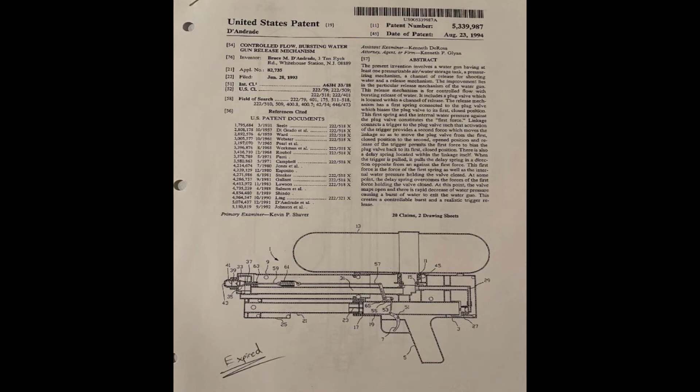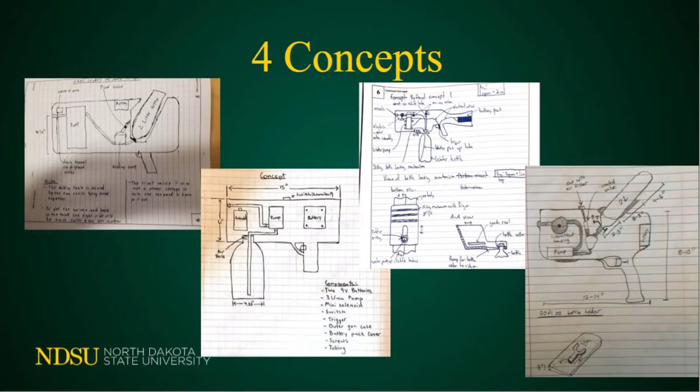The main project requirements are that the blaster needs to look fake, water needs to be stored in a 2-liter pop bottle, it also needs to have a continuous and intermittent stream of fire, and the continuous stream needs to reach at least 20 feet. Initial research was to determine whether we go with the water blaster or foam dart blaster. After research with patents and the market, we found that the water blaster would have a better opportunity to serve the market. The next step was to generate 4 concepts.

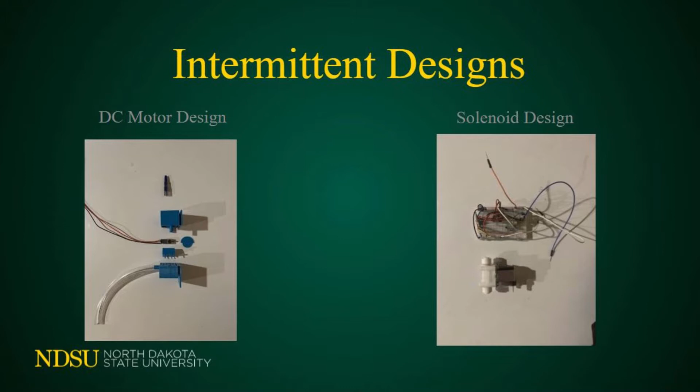All concepts included a water pump, battery pack, a general intermittent design, and a 2-liter pop bottle for a water tank, which were all in different configurations. Higher detailed intermittent designs were created later. 2 intermittent ideas were designed further for testing. For the first design, a DC motor rotates a plastic wheel into the line of water. A pen cap was used to push the DC motor up and down to generate a solid and intermittent water stream in the same design.

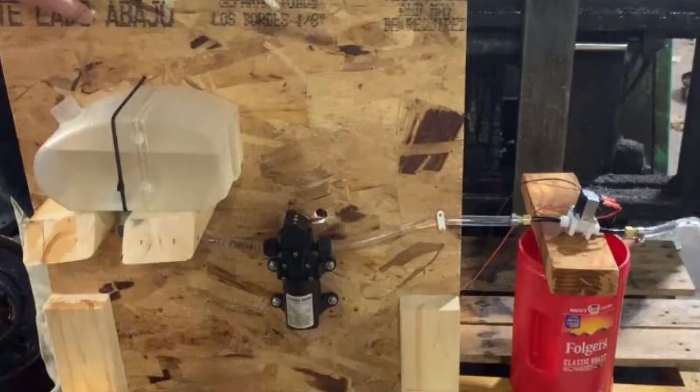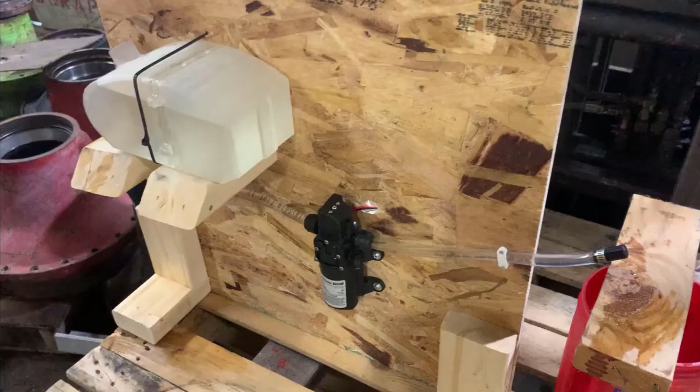The second idea was to power an normally closed solenoid to start and stop the water flow at a specified time increment. This was purely electrical. For testing, 3 different pumps were purchased to see which would project water the required 20-foot length. To reduce issues with water and the electrical wiring, a test stand was made to easily test other components such as various nozzles and 2 intermittent designs. When testing, issues were found with supplying enough air into the pop bottle without crushing when water was pumped out. The new requirement was then set by the sponsor to create a tank that can be removed from the launcher.

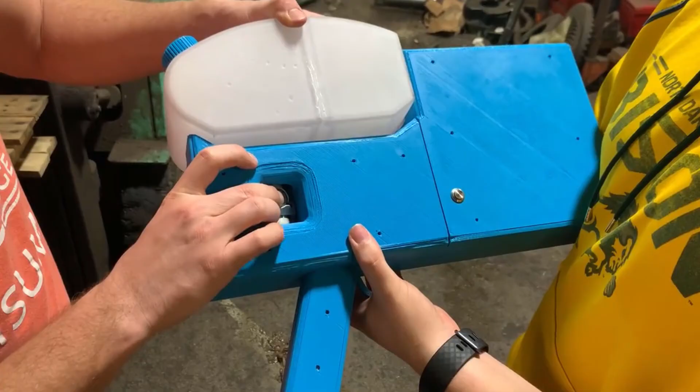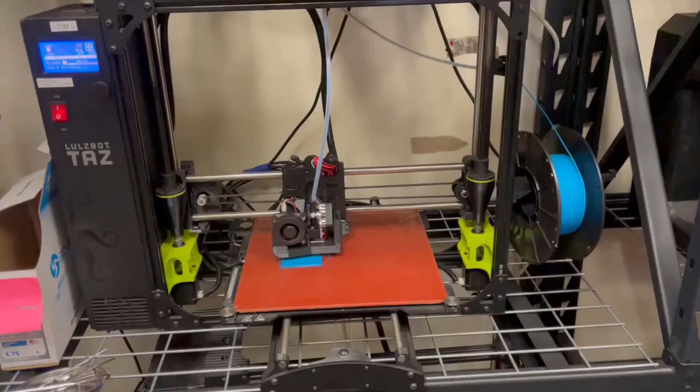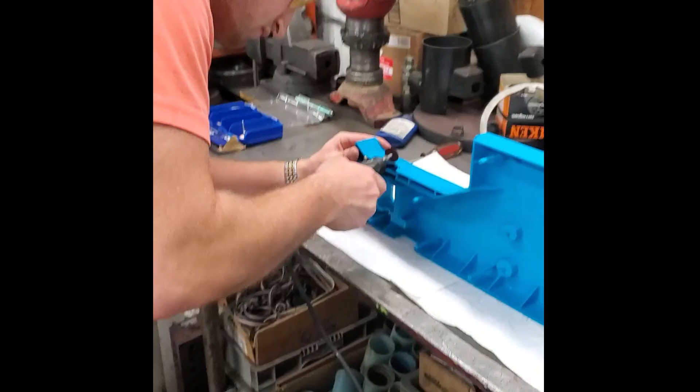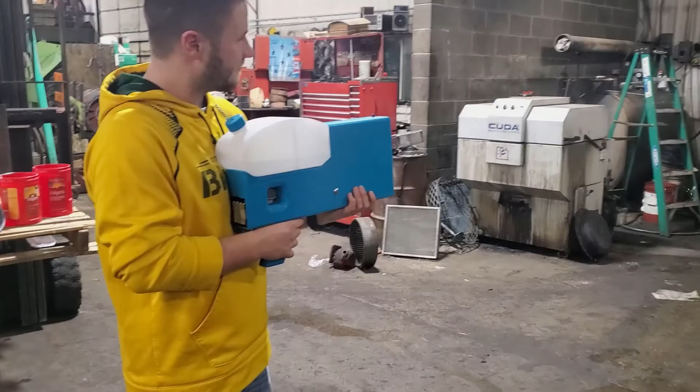The fully assembled water launcher was then tested to assure all requirements were met. The launcher's weight was under 5 pounds, the water distance was well over 20 feet, and it took 1 minute and 20 seconds to empty the tank on solid stream mode. For future work, a more attractive design can be created, improvements can be added to the internal designs, and large-scale manufacturing of this product can be investigated and set up.